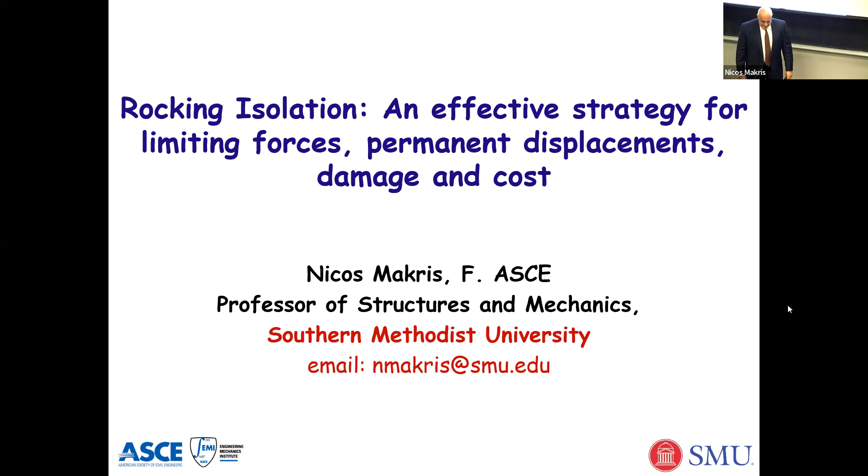So today's talk is on rocking isolation. And I will commence my talk with... this way, yes. So Tommy, the slides are advancing like this, right? So anyway, I'll commence my talk with this aerial view from the Carquinez Strait, which is slightly north of San Francisco, as we drive from San Francisco to Sacramento.

It shows in a rather convincing way the growing transportation needs of our society. Here you can see three bridges: a 1930 steel railway bridge that's still around as a historic structure, a 1962 bridge that for many decades served both the inbound and outbound traffic from San Francisco north, and a more recent bridge built to serve the outbound traffic from San Francisco to Sacramento, whereas this 1962 bridge that had far exceeded its lifespan was kept in service using response modification strategies, serving the inbound traffic to San Francisco.

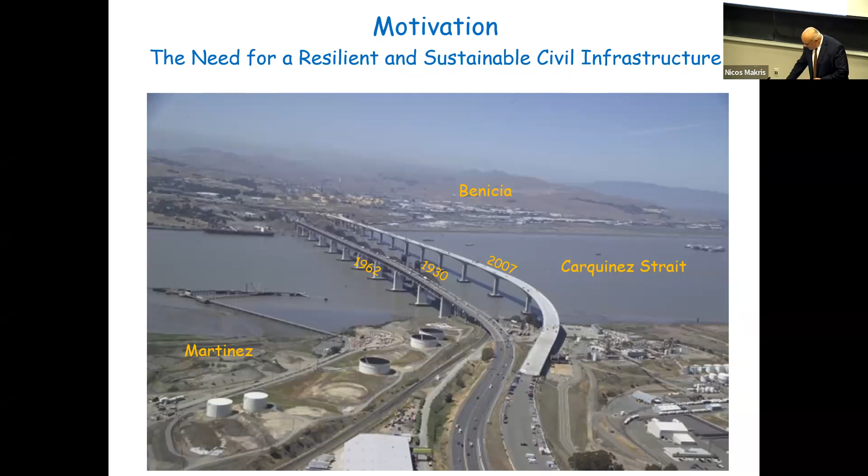How was this achieved? It was achieved with the technology of seismic isolation. This is a closer view of the 1962 Benicia-Martinez Bridge. Isolation bearings, sliding isolation bearings, were placed between the piers and the deck of the bridge to limit the forces and eventually the shear forces and overturning moments transmitted to the foundation of these rather brittle piers. In this way, by introducing this technology, they were able to extend the lifespan of the bridge.

Clearly, you see here that this technique of seismic isolation serves these current concepts of sustainability, right? So this bridge was kept in service. Now, sliding bearings is not the only technology to achieve seismic isolation.

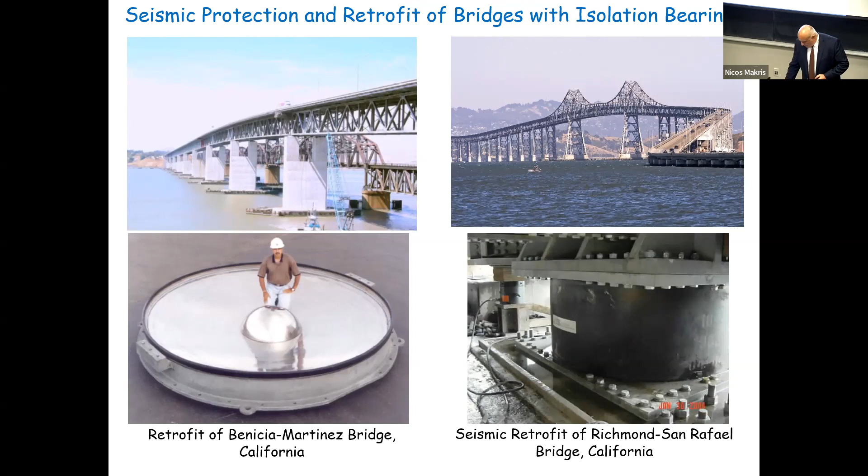Not very far away, some 40 miles south and to the west, there is another iconic bridge in the Bay Area. This is the Richmond San Rafael Bridge. Again, during the early 2000s, it was retrofitted with elastomeric bearings. So sliding bearings and elastomeric bearings are the two most prominent isolation bearings that we use for seismic isolation.

Now, in addition to isolation bearings, we can also modify the response of structures by adding damping. This is a fluid damper, one of the 94 fluid dampers that we tested for the retrofit of the Bay Bridge, and we'll talk a little bit about that.

What is most important to recognize is that these modern protection technologies consist of well-engineered devices that, when tested extensively and properly installed, lead to what we now call sustainable engineering. Sustainable engineering is the design and construction of structures that meet acceptable performance levels at present and in the years to come, without compromising the ability of future generations to use them, maintain them, and benefit from them.

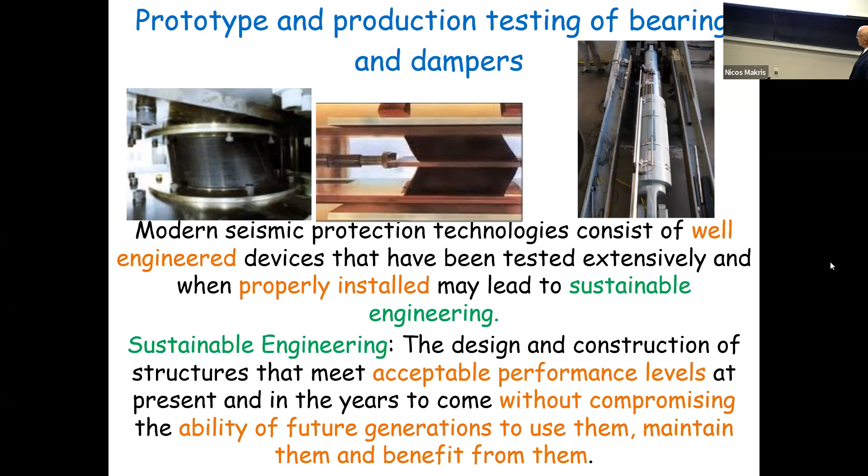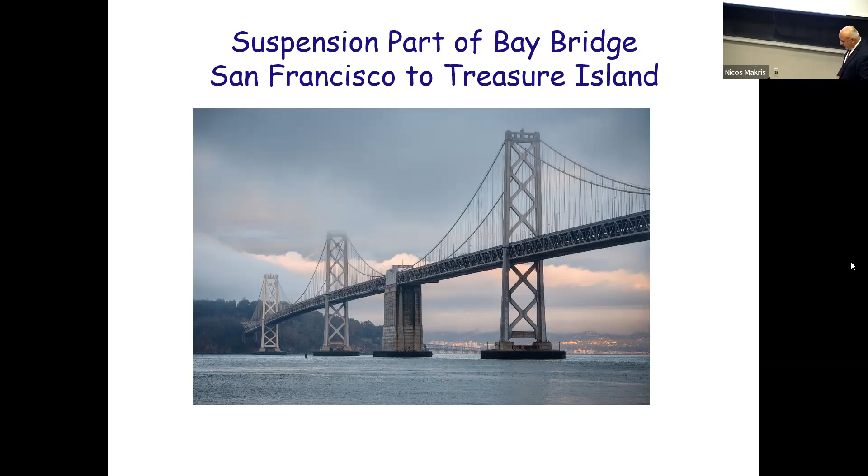So let's go to San Francisco. This is the Bay Bridge. You have here your back to San Francisco, looking to Yerba Buena Island. This is a suspension part of the Bay Bridge, and in the early 2000s this was retrofitted with 94 fluid dampers. This is one of them. These are big dampers, 450-kip capacity dampers.

A few years after they were installed, less than 5 years, right before the warranty of the damper expired, I was part of an inspection team to see the conditions, and to our surprise, all these dampers were experiencing appreciable leaking.

The reason for the leaking, which you can see here in an even more dramatic way, is that whereas these dampers were designed for seismic loads, those who did the design did not account in their installation that the bridge would also move from traffic loading. Every time an 18-wheeler was crossing the Bay Bridge, it was vibrating these by plus minus 2 inches that you see here. Because of this perpetual movement of the dampers, the end seals, essentially Teflon seals, failed.

In less than 5 years, before even the warranty expired, all of these dampers were essentially empty and they had to be removed. So here we have an example where in one of the most advanced communities of the United States, the Bay Area, and certainly one of the most advanced communities of the world, damper sustainability was not achieved.

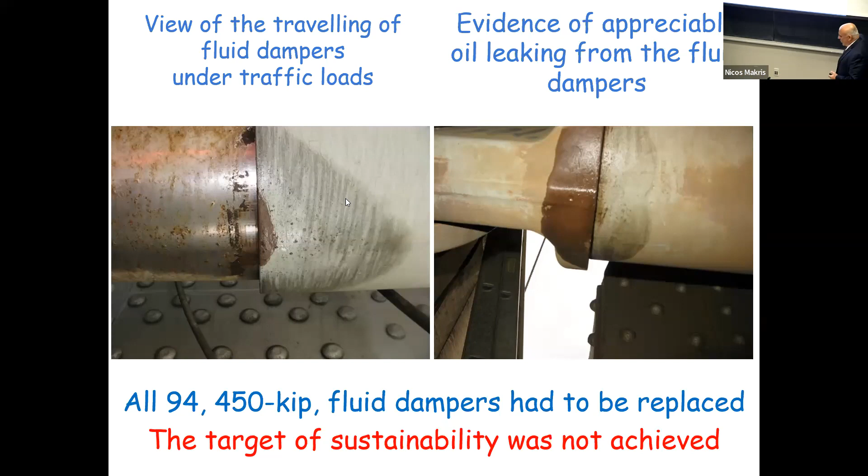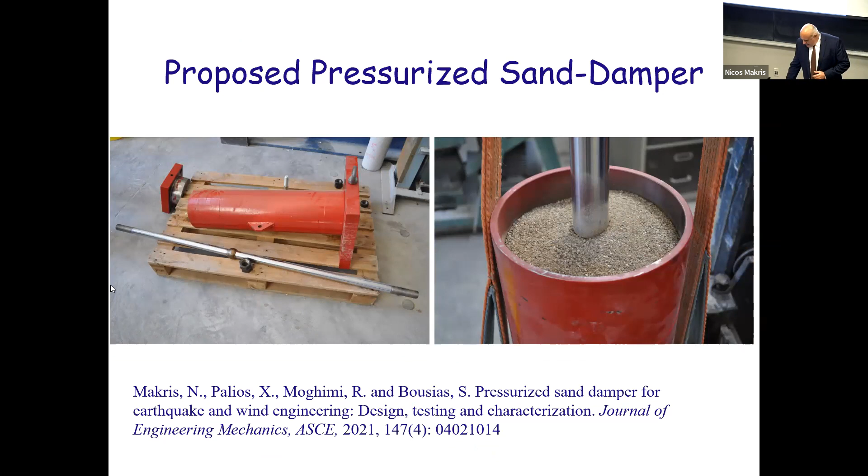So this was a motivation to do other things. We decided to design a damper that, instead of having oil inside, has sand. This has been working for several years. This is the first prototype damper that we built, actually in Greece, before I moved back to the States.

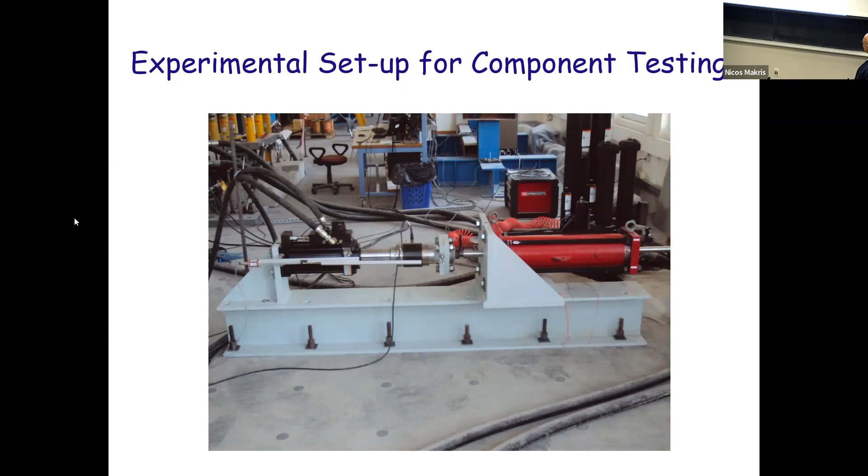So this is a view of the damper, and this is how it was tested. It's very similar to the setup you have in your small-scale testing facility. The idea is we mount the damper cantilevered, and as I explained to Professor Regis, this way you reduce the packing length, so the actuator is essentially pushing from here to here. Now, these are the force displacement loops that we report. You see that the damper has this hysteretic behavior as the sand is compressed, giving this pinching effect.

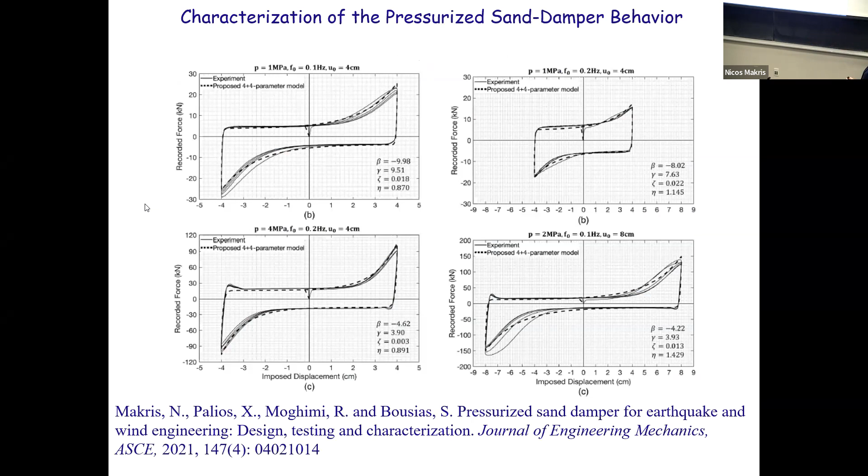I should say that something happened and we uploaded another version of this presentation. My student now at SMU, Costas Calvas, is working on a system design of this damper that we built here in the States under NSF funding, to study various parameters in the design of the damper that we need to understand in order to develop dimensional laws that will lead to optimal designs.

So this is the scene with response modification devices, but now I want to move beyond that to alternative ways of doing response modification strategies. Today I want to talk about rocking isolation: the basic concepts, application to valley bridges, and how these findings reinforced our ideas about retrofit of historic structures.

The motivation for developing rocking isolation can be introduced with this slide, where I show one of the many bridges that were built in the late 90s in Greece. This is a valley bridge, and when you have a valley bridge, you have very tall piers. This bridge is seismic isolated, actually with sliding bearings, where the coefficient of friction is only 5%.

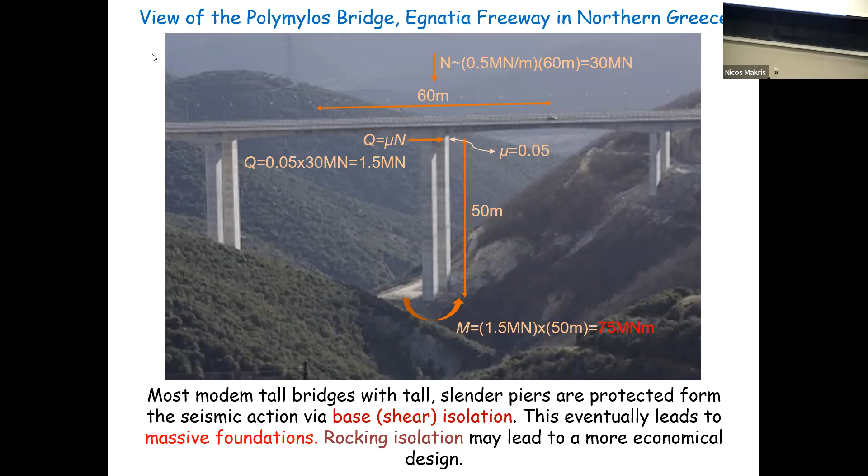And so the shear force, 5% of this force, is 1.5 meganewtons. But if you apply 1.5 meganewtons times the lever arm, you get this huge bending moment at the bottom that even very deep pile foundations cannot accommodate. You have to build caissons, so you go to this very expensive foundation design, and this leads again to very expensive structures.

So let's see if we can do something different.

In modern structural engineering, when we ask somebody to design a good frame, the first thing that comes to mind of a good structural engineer is to design a statically indeterminate frame, so that we have some redundancy. So static indeterminacy or redundancy is the first element in the design. The next one is that this frame should be ductile, the connection should be ductile, in order to dissipate energy during cyclic loading.

And the next element of a good structure is that even after yielding, this structure always has positive stiffness, so you avoid P-delta effects. So redundancy, ductility, and positive stiffness are the three good things we teach in the classroom for good structures.

Now ancient builders did exactly the opposite. Instead of building statically indeterminate structures, they built mechanisms. So a freestanding column is a one-hinge mechanism. Two freestanding columns with a rigid beam on top is a four-hinge mechanism.

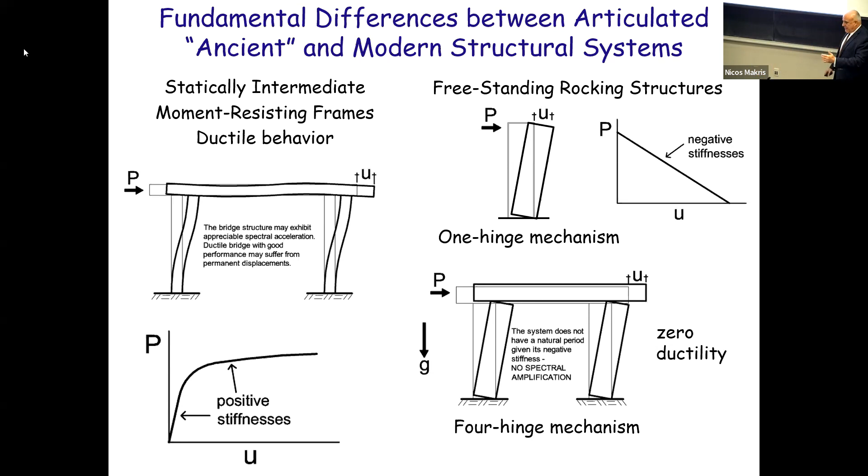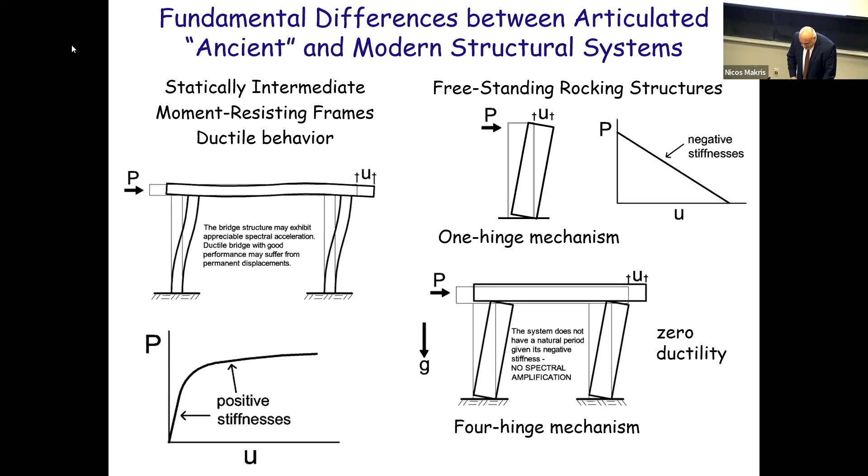So ancient builders did exactly the opposite: instead of redundancy, ductility, and positive stiffness, they had mechanisms, no ductility, and negative stiffness. Yet these structures did exceedingly well through the centuries.

They resisted the test of time, and these structures actually prove that they meet the current, most stringent design requirements — that they can survive an earthquake that has only a 2% probability of being exceeded in 50 years. If you do the calculation, this gives a return period of 2.5 millennia, and this is exactly the case here.

So these structures are indeed a triumph for sustainability. They have been around forever, without asking any maintenance, and the only thing mankind did to these structures was try to destroy them during various wars and other conflicts.

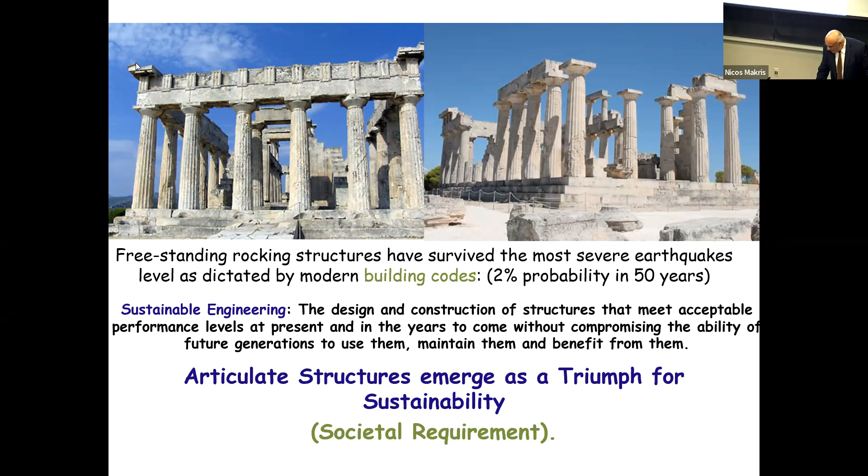So in order to understand why these structures behave so well and have such superior earthquake performance, let's study for a bit the rocking response of the single column, the solitary column, which is defined essentially by its width, height, and the intensity of the gravitational field.

In other words, the ratio of width over height gives a slenderness. And the size we express here with half diagonal, which is the square root of b squared plus h squared. So we have three things: either width, height, and g, or size, slenderness, and g.

In a similar way that a single degree of freedom oscillator is defined by stiffness, damping, and mass, a rocking structure, a rocking column, is defined by width, height, and G. These are the three things.

They look similar, but they are very different. For instance, we already stressed that the stiffness away from equilibrium in the harmonic oscillator is positive, whereas in the rocking column it is negative.

Another important element is that the restoring mechanism in a harmonic oscillator is the elasticity from the spring, whereas the restoring force in the rocking structure comes from gravity.

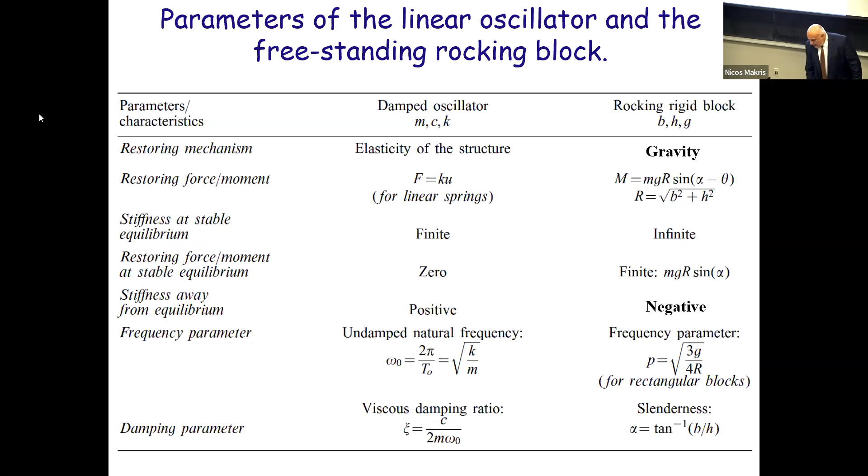Now, the stability of tall slender structures, of course, was well known from ancient times through the construction of these emblematic temples. But the first person who really uncovered its dynamics was George Housner back in the early 60s at Caltech.

He showed that among two freestanding rocking columns that have the same slenderness, meaning the same aspect ratio, the same width over height, the taller one is more stable. So he brought forward a size effect. What essentially he showed in his paper is that the larger of two geometrically similar blocks can survive the excitation that will topple the smaller block.

And he plotted these results in this way. Here, alpha is the slenderness. Actually a better way is tangent alpha, but when alpha is small, tangent alpha is equal to alpha. A is the acceleration of the pulse on the numerator, and G alpha or G tan alpha is the acceleration that you need to create uplift. So on this vertical axis, you have how much acceleration you need to overturn the column compared to how much acceleration you need to uplift the column.

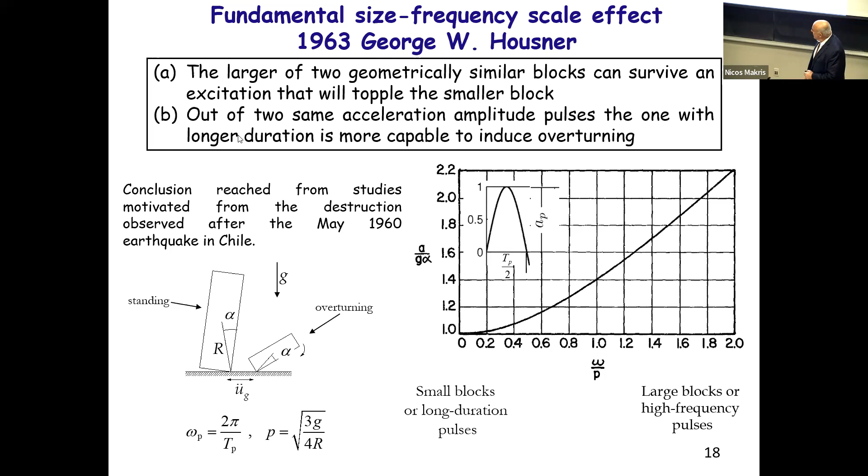So the column will uplift when the force equals G tan alpha. He showed here that as the size of the blocks or columns increases, this P here is the square root of G over R. So when R is bigger, going to bigger columns, this P becomes smaller. Omega is the frequency of the excitation. So when the size of the column increases, this ratio increases. He showed that there's a big margin between the acceleration needed to create overturning compared to the acceleration needed to create uplifting. This is why tall, big structures have this extra stability compared to smaller structures with the same aspect ratio.

So one can write the equations of motion. I don't want you to understand everything, but you have two equations, one for positive rotations, one for negative rotations, which can be combined using the signum function, a generalized function. All I want you to remember is that the angular acceleration equals this p squared, the frequency parameter, times something. As the size of the column increases, p decreases. So even without solving this equation, it tells us that in a bigger structure, p is smaller, and the angular acceleration is going to be smaller.

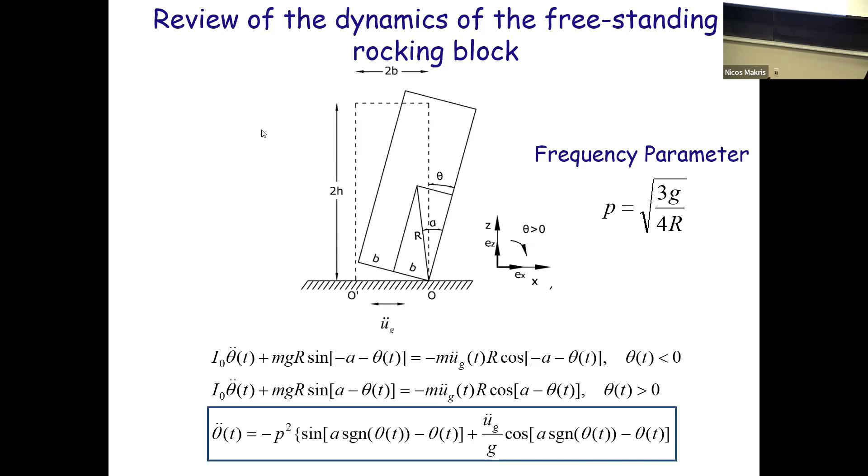Now I want you to remember this because I'm going to use it later on. George Housner, in order to create the overturning spectrum I showed you earlier, used a half sine pulse. Now half sine pulses do not exist in nature. What we have are ground motions, but some of them have these coherent pulses, and these are some of the mathematical pulses that capture very well the coherent component of strong ground motions.

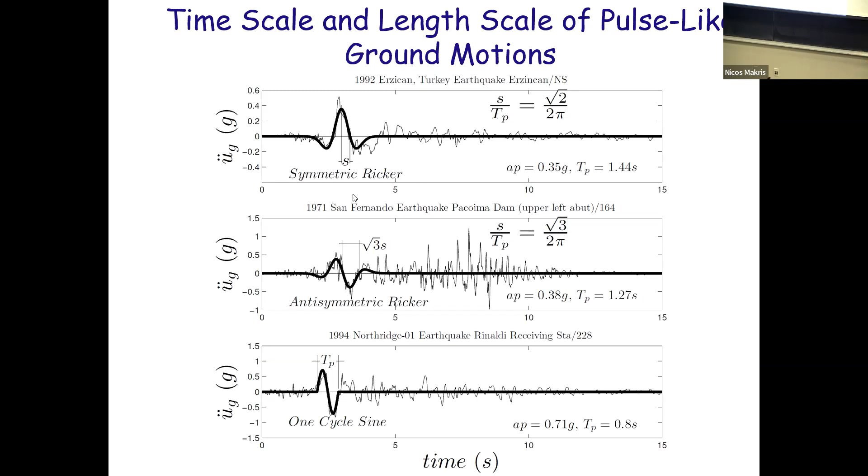So we derive, in a similar way that Housner derived the overturning spectrum for a half acceleration pulse, this same result now for these physically realized pulses. Again we plot the results in terms of the dimensionless term: the acceleration of the pulse needed to create overturning compared to the acceleration needed to create uplifting. You see that regardless if this is a one-sine pulse, a symmetric Ricker wavelet, or an antisymmetric Ricker wavelet, we have the same trend that as the size of the block increases, you need a way bigger acceleration to create overturning. And this increase is very dramatic.

Whereas here, of course, when the block is very small, upon uplift it overturns - there is no safety. But when omega p over p is on the order of 8, you get a 10-fold increase. So it will uplift, but then you need 10 times that acceleration to create overturning. So we can enjoy this huge dynamic stability in our design.

Okay, so I'm going to explain to you why this dynamic stability happens. Let's do what people were doing until very recently, when they were trying to find the stability of these freestanding structures. They were using what the code says to do an equivalent static lateral force analysis.

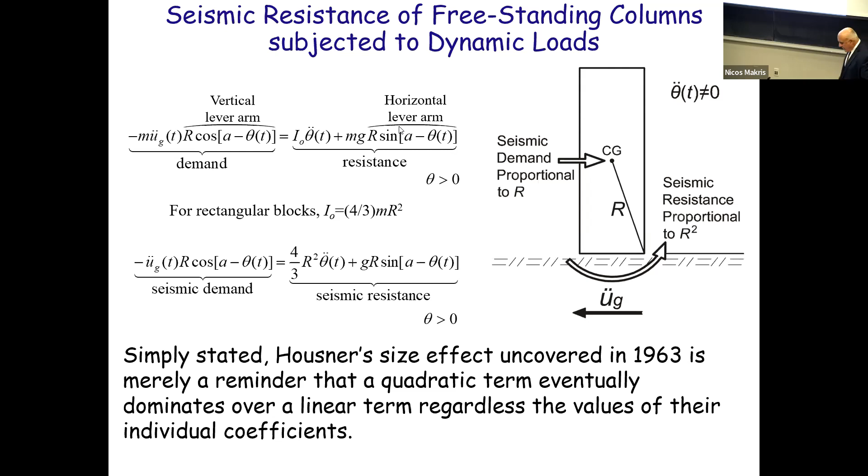This is the dynamic stability problem. So you have here the size of the column. This is the seismic demand, a linear function. This is the seismic capacity that comes mainly from the need to mobilize the rotational inertia. And eventually the seismic capacity will always be greater. So in the book, whenever you see something interesting, I also show the papers where we've published these results.

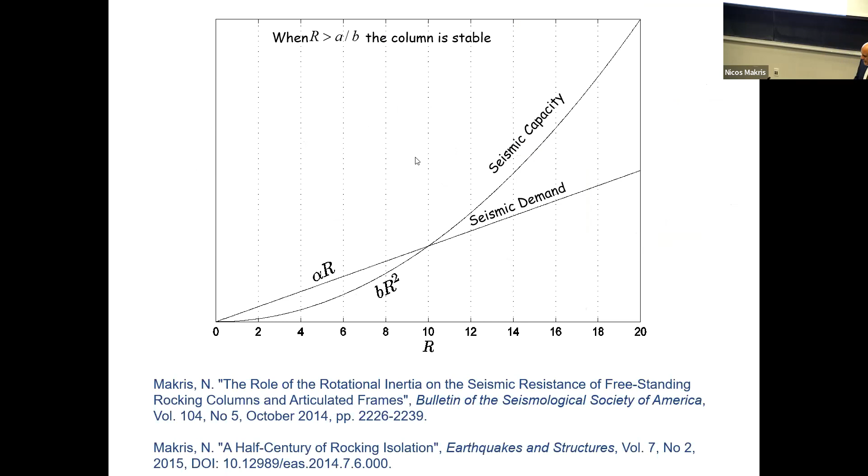Okay, now I want to move to something more practical. In life, when we have big tanks or when we build bridges, we don't have like a solitary column, but we have an array of columns coupled with a rigid beam. Would be columns coupled with a deck.

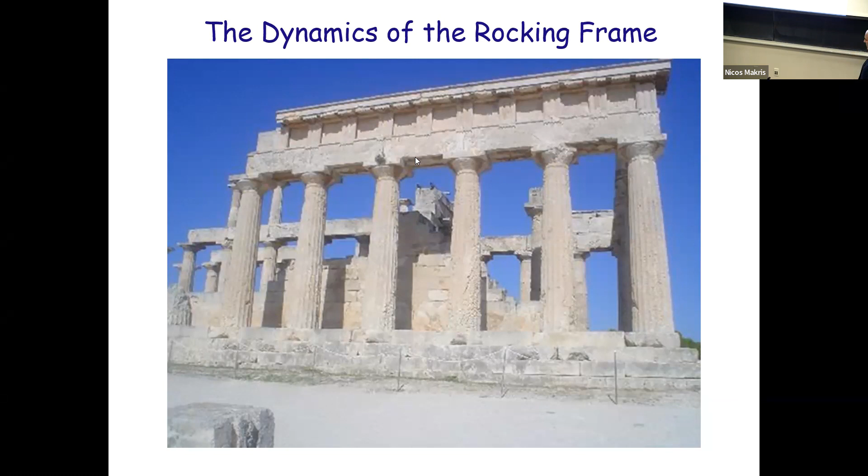So I want to find the dynamics of this system here, which is what is this? This is an array of freestanding columns of the same slenderness, same size, which are capped with a rigid beam.

Now, this is a single degree of freedom structure, but it's a difficult single degree of freedom structure, because we have too many unknowns. So the degree of freedom is theta. So each column rotates by the same amount. The horizontal displacement, the vertical displacement can be expressed in terms of the rotation theta.

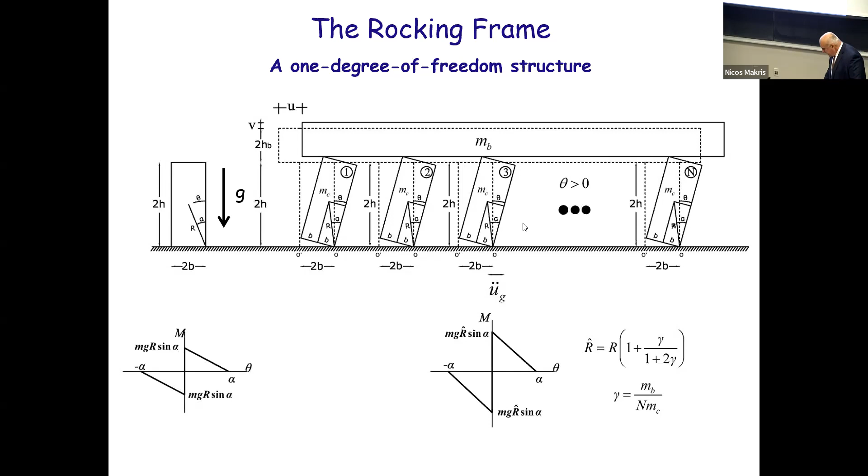You can solve this problem in two ways. Either you can use a direct approach, what we call Newton's law, F equals ma. But you can solve this only if you have only two columns, because you need to calculate these internal forces that are between the top of the columns and the bottom of the cap. If you have more than two columns, you have too many unknowns, you cannot solve.

But you have an alternative way of solving things in dynamics, to use Lagrangian dynamics. It's an indirect approach which essentially says that among all geometrically admissible paths that a structure would go from point A to point B, the true path that is going to happen is the path along which the difference between the kinetic energy and the potential energy is minimized.

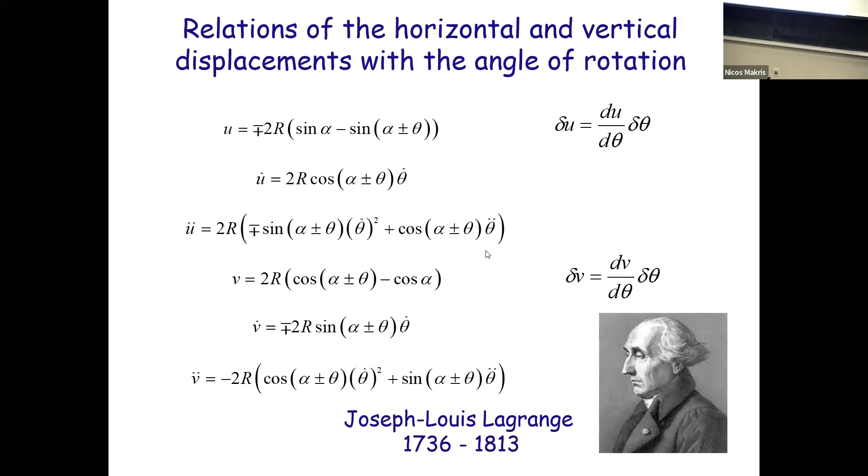Okay, and by doing this in dynamics, you get what's called the Euler-Lagrange equation, and then you can solve. So this is what I said before, that the horizontal and vertical displacement are related to the rotation theta. These are the velocities. So it's a single degree of freedom structure. And by following the Lagrangian formulation, because you have more than two columns, like when you have a bridge with more than two piers, this approach works.

This is the equation: T is the kinetic energy, theta is the rotation, theta dot is the angular velocity. The kinetic energy is very easy to calculate. Q is what we call the generalized forces. W is the work, and when you follow this Lagrangian approach...

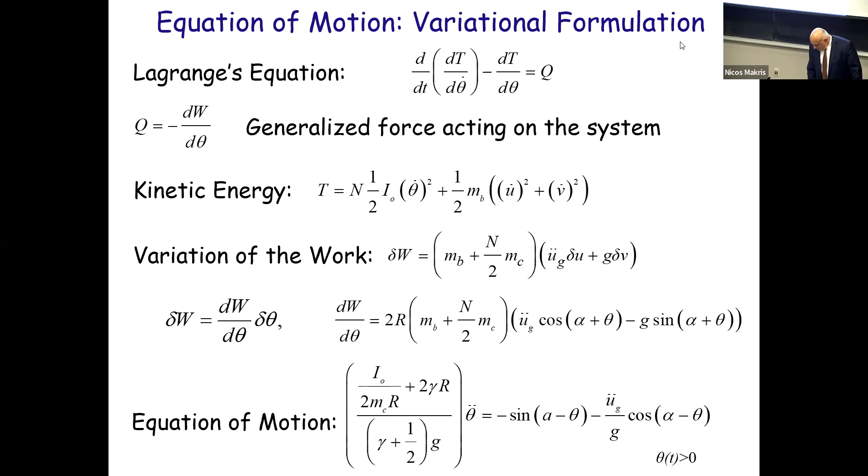You find the solution: the angular acceleration is something else that multiplies p squared, we saw this before, times exactly the same thing that appears in the solitary column. This is a very interesting result, because this ratio gamma is nothing else than the mass of the beam divided by the mass of all the columns, right? So this quantity gamma is always positive, it's a ratio of two masses.

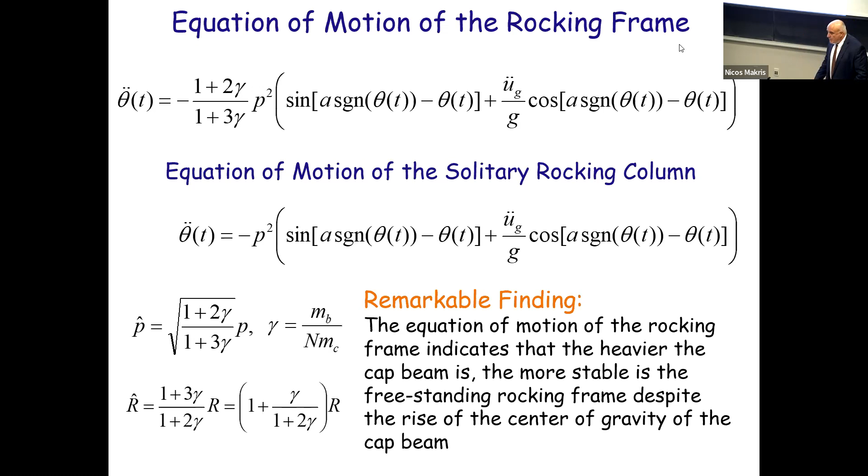The mass of the cap beam of that system divided by the mass of all the columns. So this ratio, 1 plus 2 gamma divided by 1 plus 3 gamma, is always smaller than 1. By being smaller than 1, it says that the angular acceleration of the rocking frame, what I call now, is equal to what happens to the solitary column, because P is the frequency parameter of the solitary column, times by this quantity smaller than 1. So it corresponds to an even smaller apparent frequency parameter. So this is even more stable.

So what we find here is that the equation of motion of the rocking frame indicates that the heavier the cap beam is, the more stable is the freestanding rocking frame, despite the raise of the center of gravity.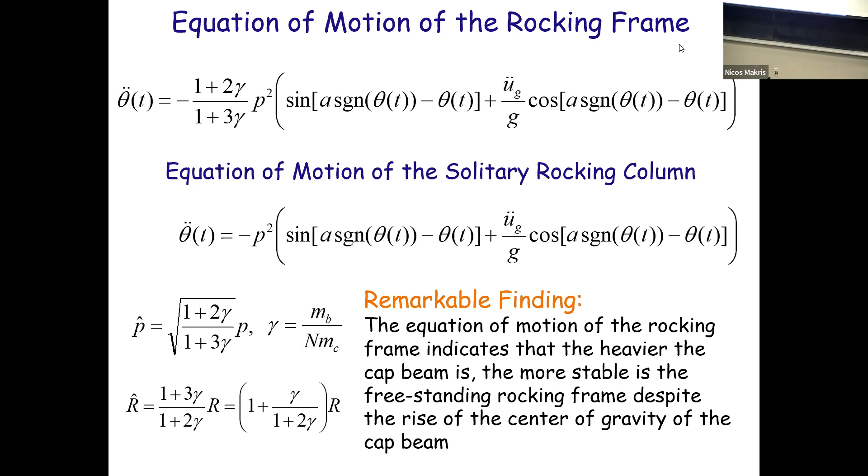Let me show you this schematically. This equation says that the dynamics of this system here, where you have an array of columns of slenderness alpha and size r, capped with a beam with mass b, is identical, mathematically identical, to the dynamics of a solitary column of the same slenderness alpha but with bigger size. But if you have bigger size, you are more stable. So this column here is more stable than this column, and so that system here is more stable than this individual column, right? So these are great news

for seismic protection.

So let's summarize what we have shown here. We knew already from George Housner that among two geometrically similar columns, the bigger one is more stable compared to the smaller one. And then what we have shown, and these are the papers that have shown these things, is when you take two of these columns and cap them with a rigid beam, this system is more stable than that, because this system here corresponds to a column of the same slenderness but larger size.

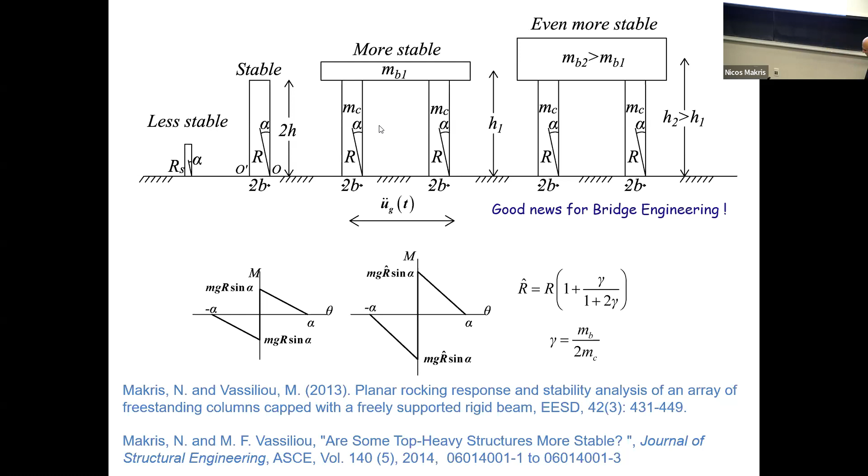But then if you increase the mass of the beam, that 1 plus 3 gamma divided by 1 plus 2 gamma increases asymptotically to 1.5. And as you increase the mass of the cap beam, this becomes even more stable, which is actually counterintuitive, right? But this is what the equations show, and this is what we have to accept. So this is great news for many things.

So we published this paper, 'Are Some Top-Heavy Structures More Stable?' And this is something that, for instance, was great news for reconstruction.

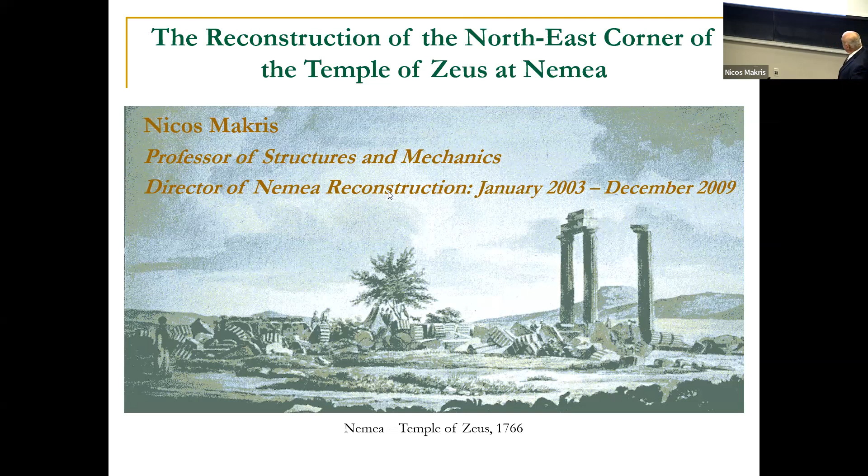As Professor Ricky said, I was involved in the reconstruction of an ancient Greek temple, this is the temple of Zeus in Nemea, Greece. There are only three standing columns from the ancient times. We embarked on this 7-year project to reconstruct this northeast corner. You see here how badly damaged the foundation was of the only one column remaining from the ancient times, on the base side of the temple.

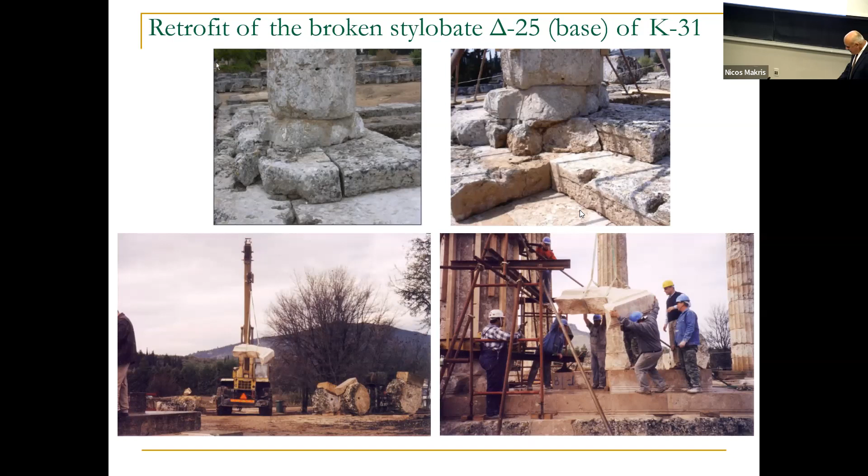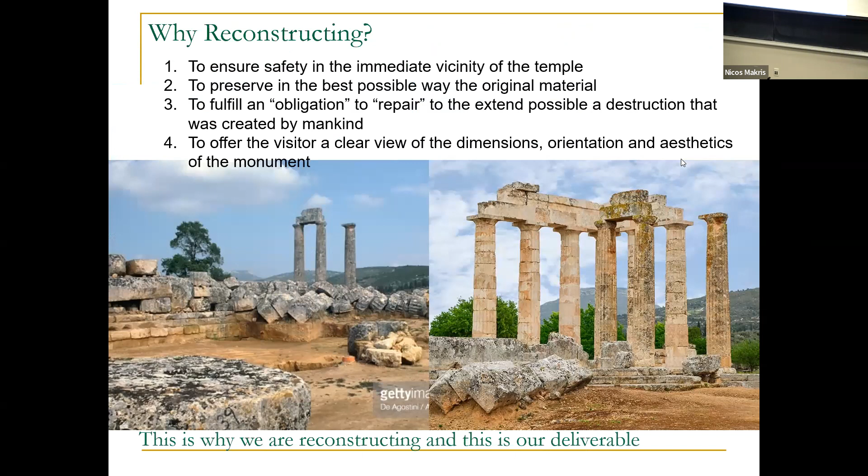There was a question of whether we had to place atop the epistyles. But now we knew that by putting the epistyles on top, which are top heavy, this is going to be even more stable. And how do we know this? We know this from this guy, from Lagrange, right? By Lagrangian mechanics, they had a very convincing argument to put this on top. So this is where we started, and this is how we reconstructed the northeast corner, and this is the end product of our effort.

Of course, this idea is also great news for bridge engineering, because now you know that if we let things rock, the heavier the deck, the more stable the structure.

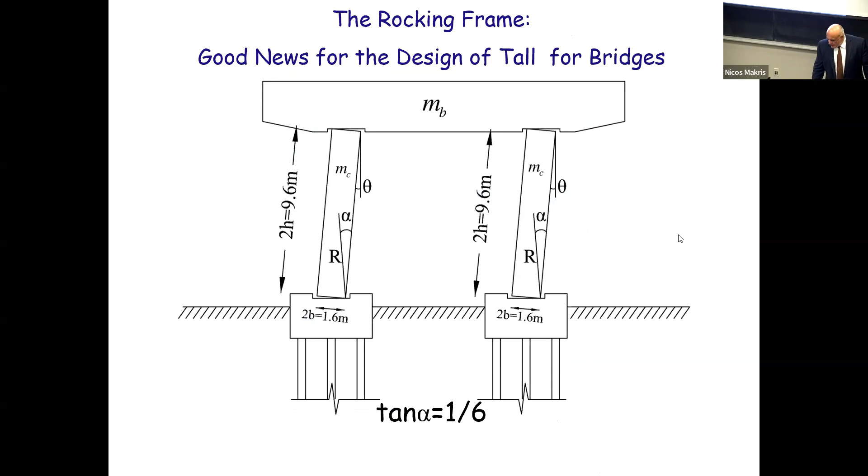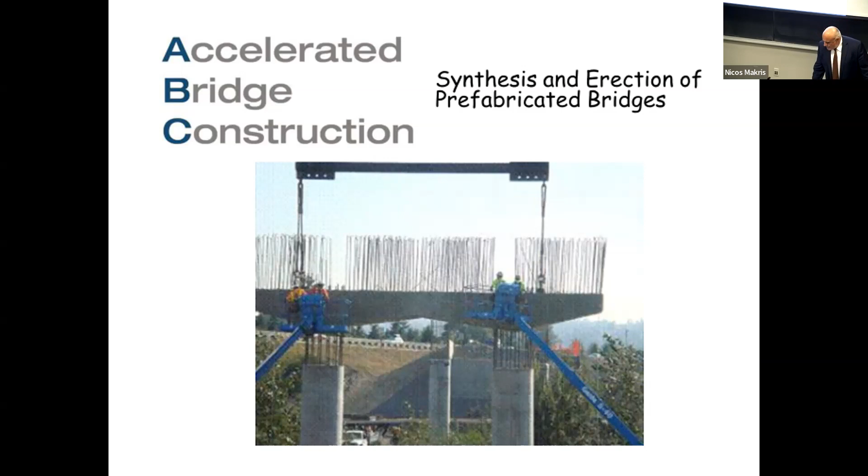We have been working a lot on this, and the idea is that at some point in structural engineering, when we build bridges with tall piers, we have to disentangle from capacity design, where we bring all this reinforcement, and move on to this concept of articulated structures, which lead to very stable structures because of their ability to move. And this was not a secret.

It was implemented in New Zealand with the South Rangitikei Bridge. The reason it was implemented is because these bridge piers are so tall that any other solution is not feasible. The overturning moments at the base of this bridge were so large that no pile foundation could be designed to take these huge forces. So the engineers decided to make these piers freestanding.

This was called at that time a stepping bridge, and this bridge is capable of stepping on its legs. It was truly innovative design. This was almost 73 meters tall, and it was indeed a seminal moment in earthquake engineering and in designing seismic resistant structures.

One thing I should say is that whereas these foundations were planned to uplift, these piers were equipped with a primitive damper. This was at that time a torsional yield damper. Imagine a tubular section where the two ends are fixed and you move the middle one up and down, so these tubular sections are subject to torsion.

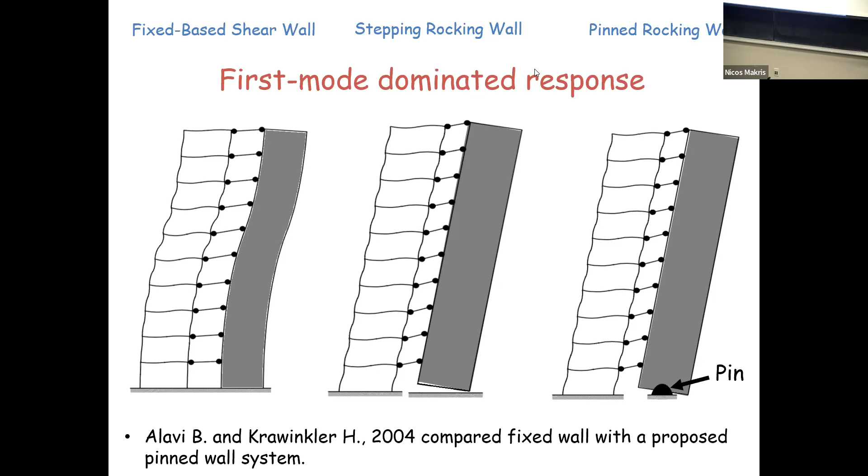So one way is to have this wall rocking, or in some applications in Japan, they have a situation where this rocking wall was pinned.

Let me go through some of the challenges of tall buildings with shear walls. When you have a fixed-base shear wall, you have larger ductility demands under near-fault pulses, cyclic degradation, residual drift, and large repair costs. When you have these inelastic deformations, you may keep the structure from collapsing, but your residual drifts—what's now called functional recovery—can be so large that essentially you have to demolish everything. So these are unsustainable parts of the practice.

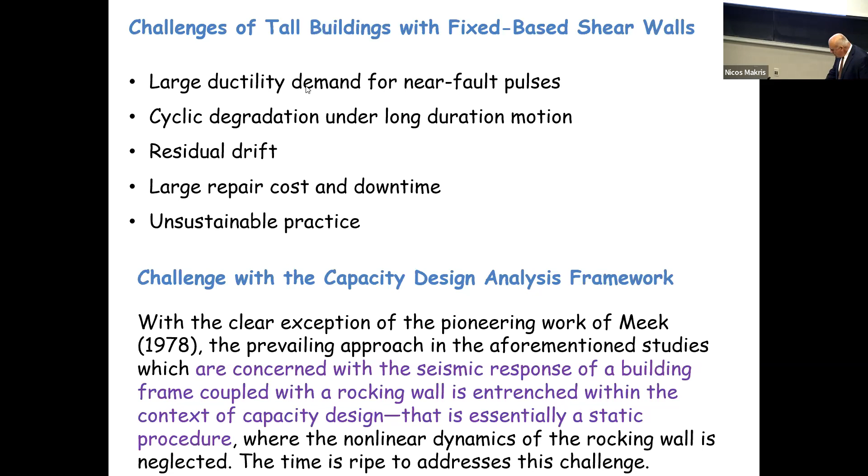So what can we do? We can do something that is not new. The idea of having rocking walls in buildings goes all the way back to the work of Meek in 1978, who published this paper and actually foresaw the need to have the moment-resisting frame somehow articulate to the wall with this kind of links.

So, advantages of stepping rocking walls: if the rocking wall is a stepping rocking wall, stepping on its two corners, you can accommodate large displacements while remaining serviceable immediately following a strong ground motion. It controls deformation with minimum permanent deformations, because the weight of the wall tends to recenter the whole structure even if it has behaved inelastically. It is indeed a practical alternative to capacity design.

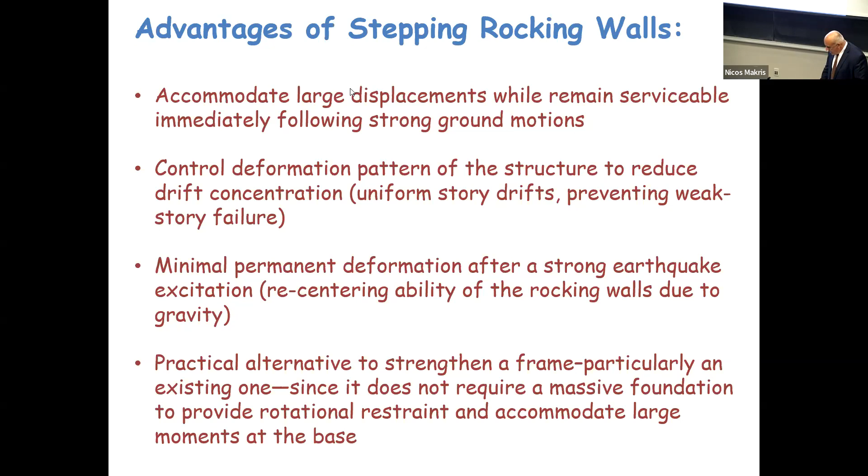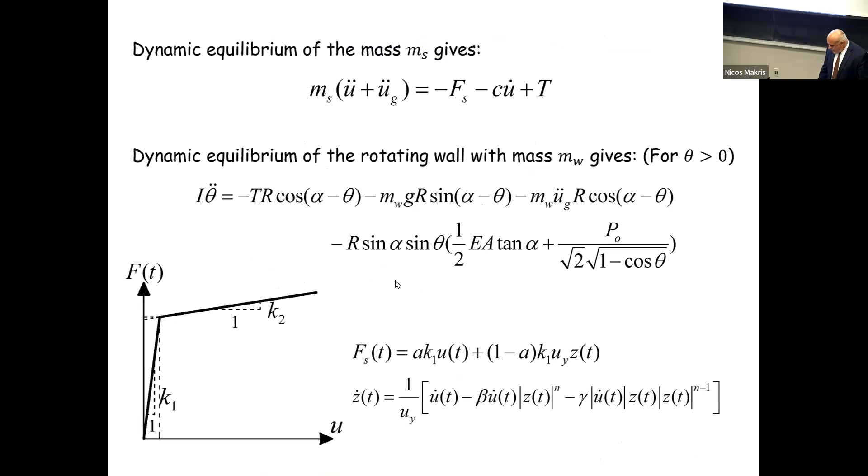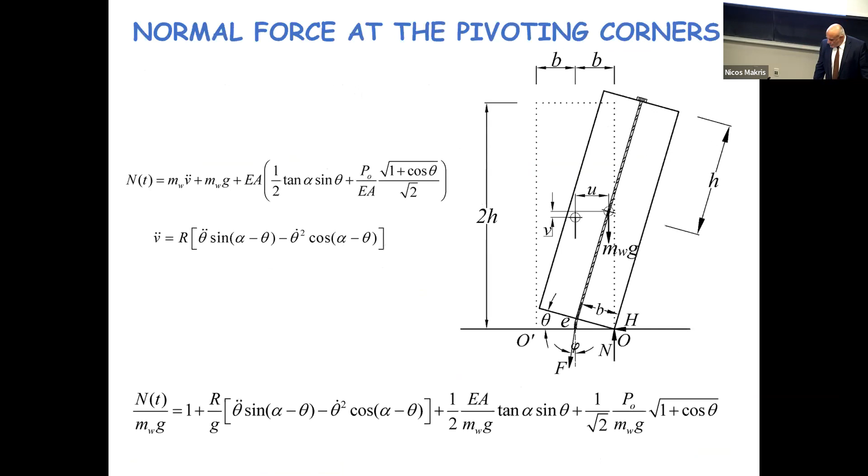We have done extensive analysis to see what the potential benefits would be by adding vertical tendons in rocking walls. The answer is that as you go to larger structures and larger rocking walls, the contribution of vertical tendons is marginal—the weight of the wall does most of the job. I have this in papers: the only thing vertical tendons do is increase a lot the reaction force at the pivot points.

We have seen here in your lab that some of these cross-laminated timber pieces suffer from this reaction force at the corners. So by creating a tendon, even when the wall is bigger, the only thing you do is increase even more the reaction force, without any change in the response of the drifts. So the conclusion is, when you go to tall structures and tall walls, there's no need for vertical tendons.

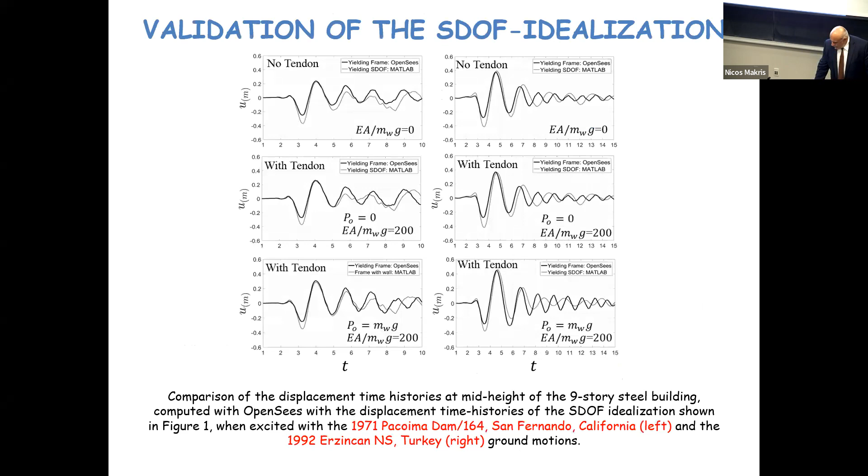I will move on because I'm running out of time. We did some analysis—these are results for the tendons.

I want to move now to my conclusions. So what are the conclusions? The main conclusion is that rocking isolation is a truly dynamic seismic protection strategy. You cannot design buildings where elements rock by using the equivalent static lateral force—it's a truly dynamic phenomenon, where most of the seismic resistance, when you have freestanding columns or walls, originates from the difficulty to mobilize the rotational inertia.

These are the results brought forward by George Housner at Caltech, that among two freestanding columns of the same slenderness but different size, the taller one is more stable. And then the findings of our studies.

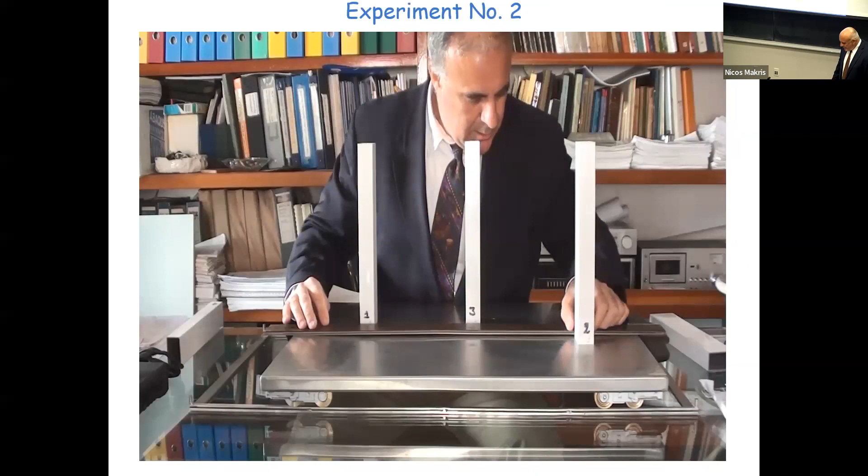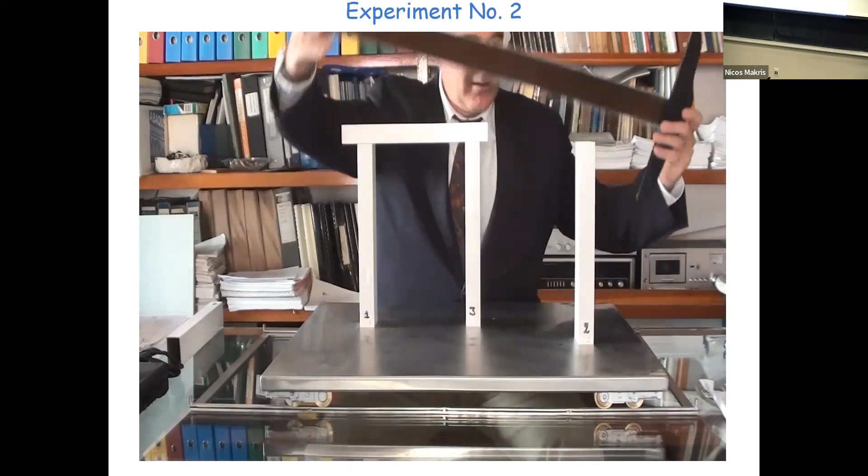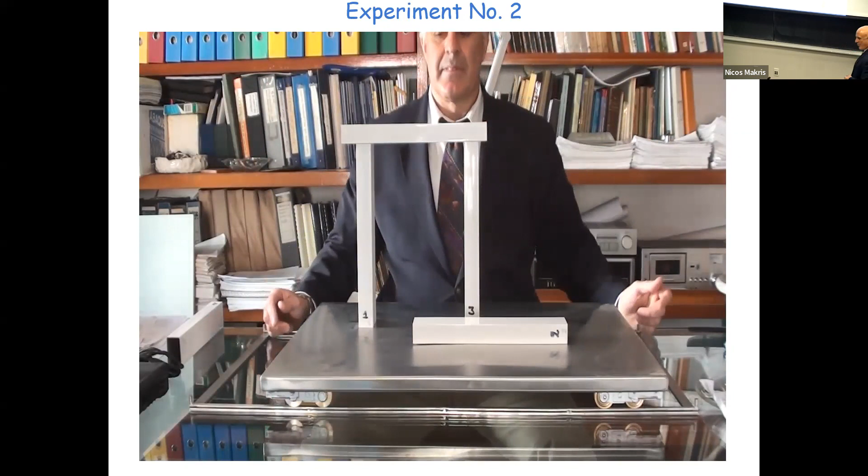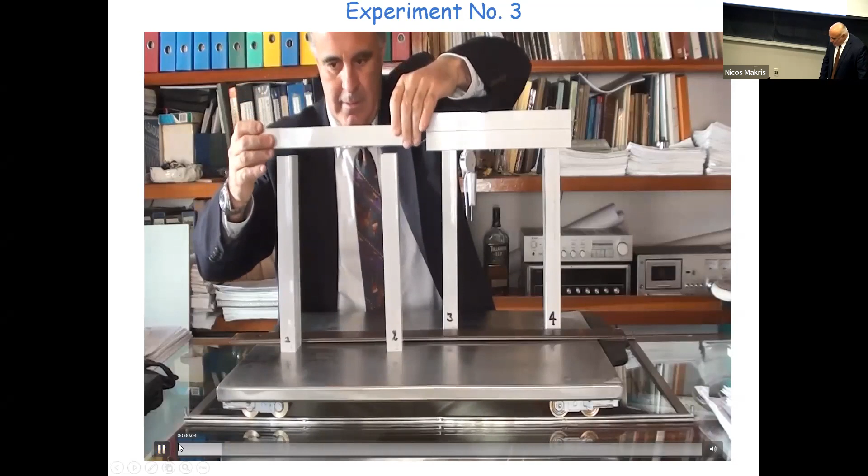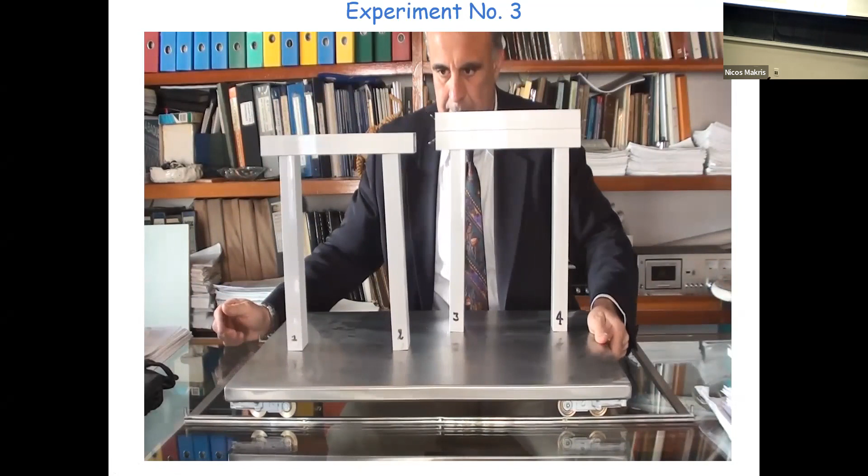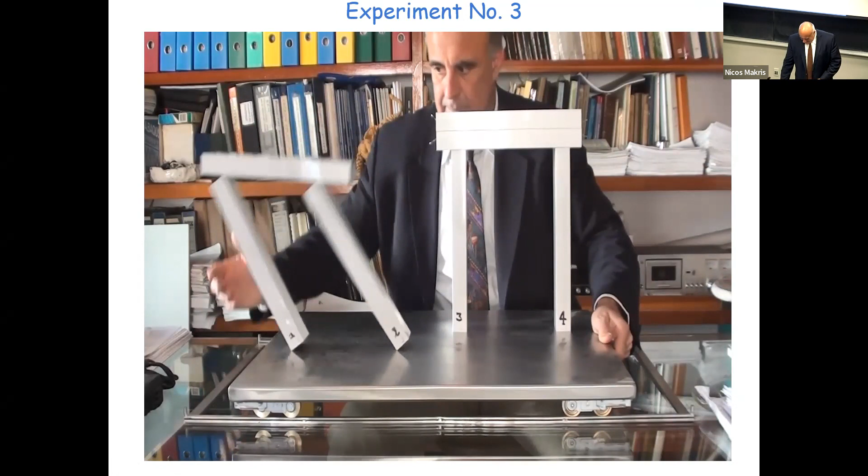The next conclusion is that if you have two rocking frames—you can see the trend—one has a cap here, cap beam, everything freestanding. This is my hand-driven shake technique I designed among two rocking structures, where the top end is overhanging. You stopped it too soon—you need to see the collapse. I'm only kidding. Okay, it's going to collapse. Let's move on.

We talked about the conclusions for rocking wall buildings too. Let me finish my presentation with this lithograph from the foothills of the Acropolis in Athens. There, extremely slender and tall columns have been standing alone for millennia, whereas Athens has experienced many earthquakes that destroyed high-rise buildings and factories—buildings well engineered with modern capacity design—while these columns have no connection, no reinforcement, no ductile design, nothing.

The only reason that these two solitary freestanding columns remain standing for more than 2.5 millennia is not because of any ductile connections or continuation of steel reinforcement, but because while they are very slender, they are tall enough to survive through the centuries the intense shaking that has damaged repeatedly the well-engineered structures in the city of Athens.

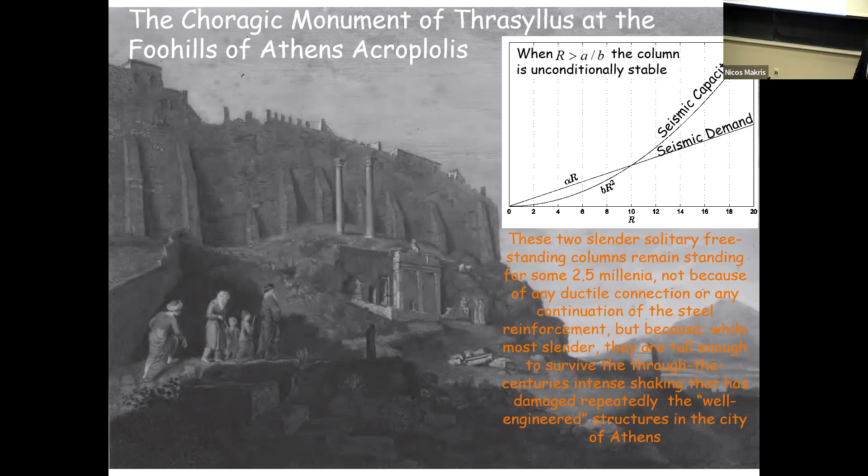So this is the last slide of my presentation that shows the adventure of the rocking frame through the centuries. It started with this very clean design, right? Then we have the evidence from nature that rocking structures can survive very violent earthquakes.

These ideas have been forgotten for decades now. Our thinking when we go to tall bridges remains entrenched in capacity design. However, there have been ideas to move away from that.

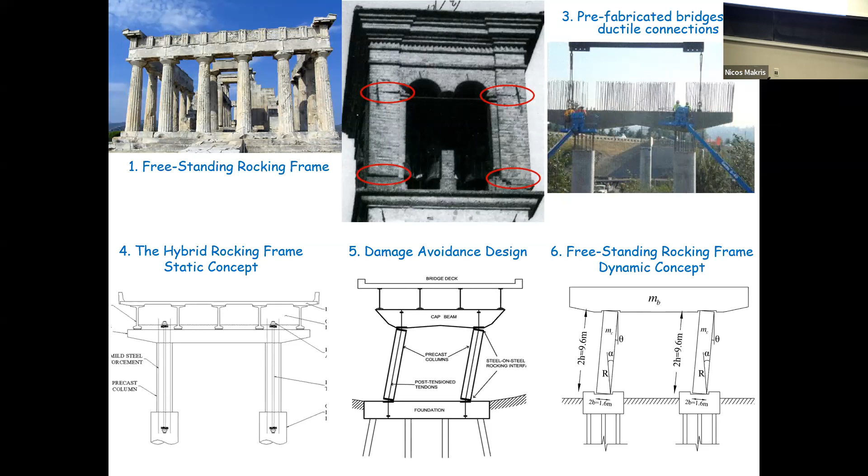I would like to mention this concept of damage avoidance design that is proposed by John Mander. But now we have shown that when these columns are large, you can even avoid this vertical post-tensioning and go to totally freestanding rocking structures.

So with that, I want to finish my presentation and thank you. This is a photograph of these two very slender columns that remain still standing. Thank you very much.

We have some questions. Okay, we'll start with, there's a few coming in. And I'm gonna just start and then we'll wait for the audience. You didn't come first, I'm only kidding, we'll get to you, sorry. So let's just read them here.

We'll go for the chat first because that's the first one that came in. What should be considered as the safe point for design on the moment rotation plot for this controlled rocking frame? So that was earlier in the presentation. What should we consider?

Okay, so let's remember what we say. So these columns have slenderness, they have slenderness alpha, and we showed that even when you have strong earthquakes, if your column is tall enough, the uplift and the overall rotation is a small fraction of alpha, of the slenderness.

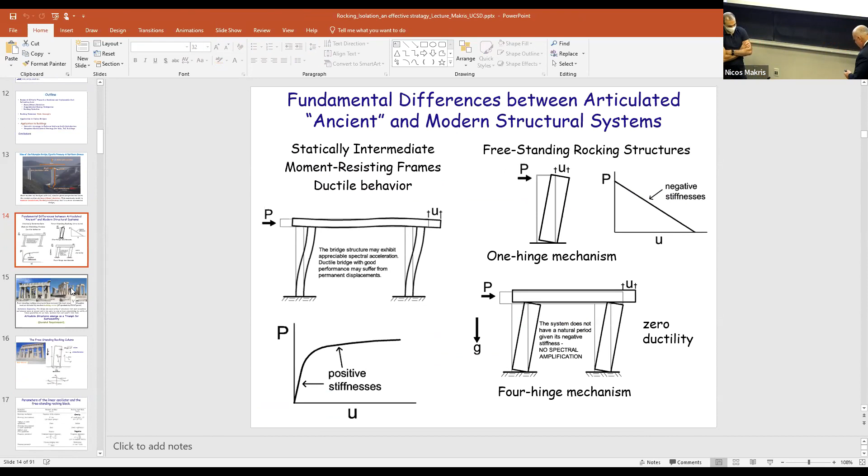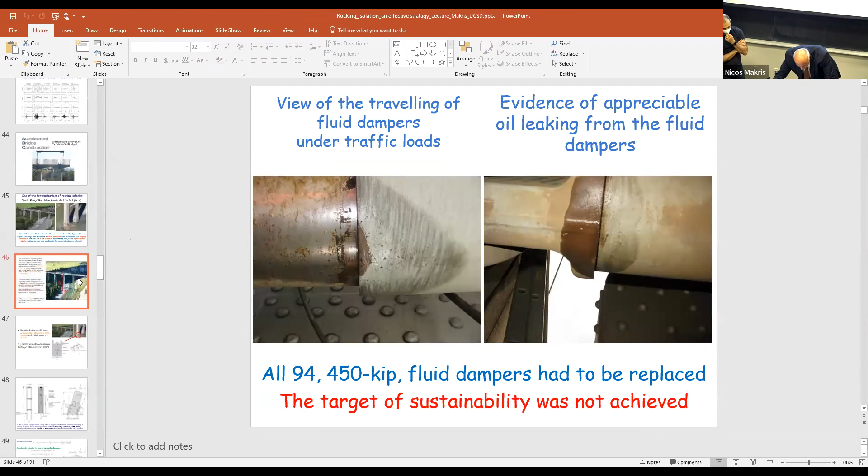So maybe I should go back here. No, I should go here so I can go very fast to answer this question. So I have here the South Rangitikei Bridge. So I'll start with this. Okay, so I'll go here. So these columns have...

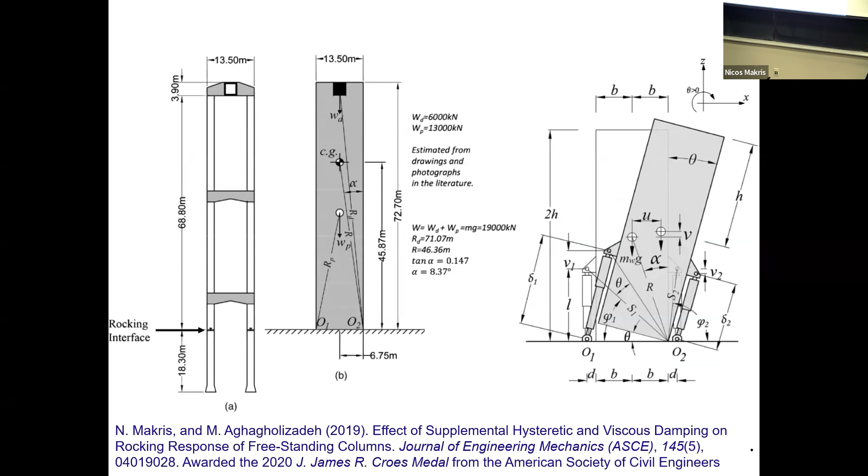They're very tall because of the railway track. The center of gravity is elevated, so the center of gravity is here. This is the slenderness. The slenderness is only tan alpha, which is 8.37 degrees, so tan alpha is 0.14. So whenever you have a horizontal acceleration, it's very important to understand this.

Whenever you have a horizontal acceleration greater than 0.14 G, which is a very weak earthquake, right, 0.14 G, these columns are going to uplift. They uplift, right? But because they are so large, the earthquake is able to uplift, but is not able to mobilize the rotational inertia. This is what is very important for us to understand, right?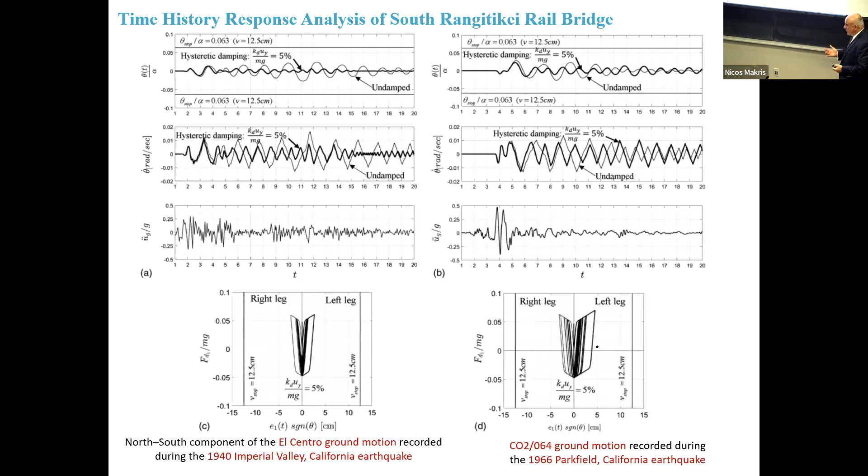Of course, when the column goes to its slenderness, then you are at the verge of overturning, but you are so far away. Even when you go to the Pacoima Dam record, here you barely reach this 6% of the slenderness. And when you go, let's say, to the Erzincan, Turkey record, you exceed that, but this is again less than 10% of the slenderness, 0.1. So the answer is that if you go to smaller structures, to smaller columns, then you have a bigger percentage of the slenderness, and this is something that needs to come out from the calculation.

What is the other question? Well, we'll ask our esteemed audience member here. So thank you very much for the presentation. You've combined two of my favorite things, which is ancient Greek buildings and structures.

I had a comment I was hoping you could talk about more. One of the things we've seen in modern buildings—I can't recall the name of the building in San Francisco—but they used performance-based seismic code to construct it. After they got it up, occupants had a lot of discomfort because of wind loading, a lot of acceleration. Typically you see that balance between wind loading requiring a heavy roof and seismic requiring a light roof. With what you're saying, you don't need to do one or the other—you can combine those two things and optimize under both. So could you talk a little about that? I want to comment on this because these are extremely interesting questions.

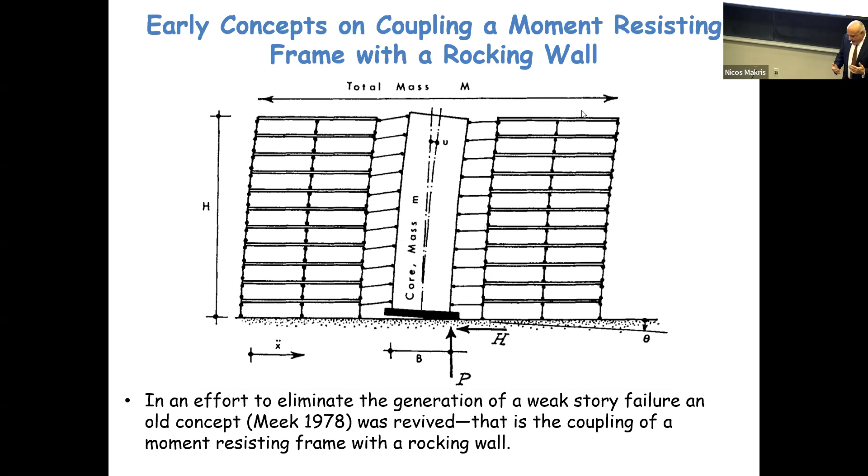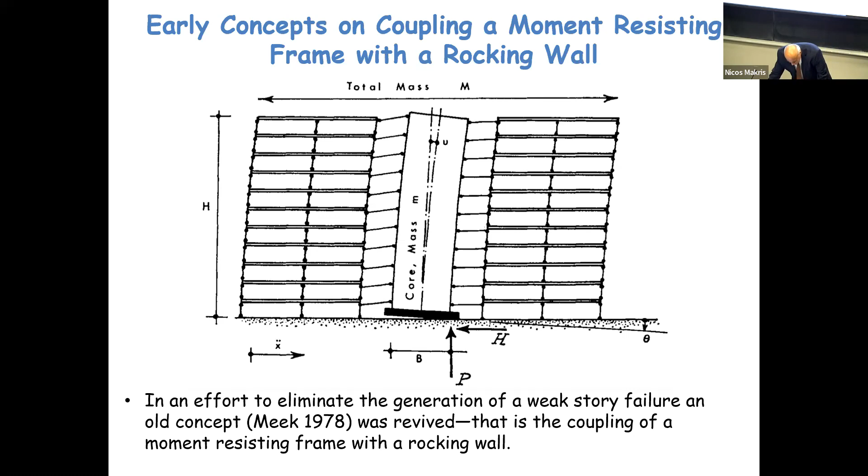But there are temples in Greece built out of limestone, and limestone has a compressive strength of only 5 megapascals, a quarter of concrete. They knew that when their columns uplift, the columns would get damaged, so they created intentional fuses. What are these intentional fuses? I don't know if you've seen these columns—maybe I have them at the beginning of my presentation, I don't know if I can pull that up.

So you can see these flutes here. Almost everybody thinks that these flutes are just architectural elements. Well, it is very pretty because in Greece you have this nice sun, and the sun gets deflected and creates a pale image of the temple. So it's really beautiful, but it has also other purposes.

Each column has 20 flutes. These flutes were carved in the marble, and then they were installing, what's the word, artificial stone to make them even look better, like grout, like we use grout. They're grouting them to make them even better. So even before they were getting damaged, they had this grouting technology to make them look even nicer.

So this protruding corner, imagine that when you have these flutes, you have these protruding corners at the base. So when the column was uplifting, these corners were immediately cracking. But these are like very concentrated points. By having these points cracking, you're creating a finite distance where the column could rock. They're intentionally yielding the location where the column is going to rock by creating a finite surface. And then after the earthquake, they're repairing it with grout.

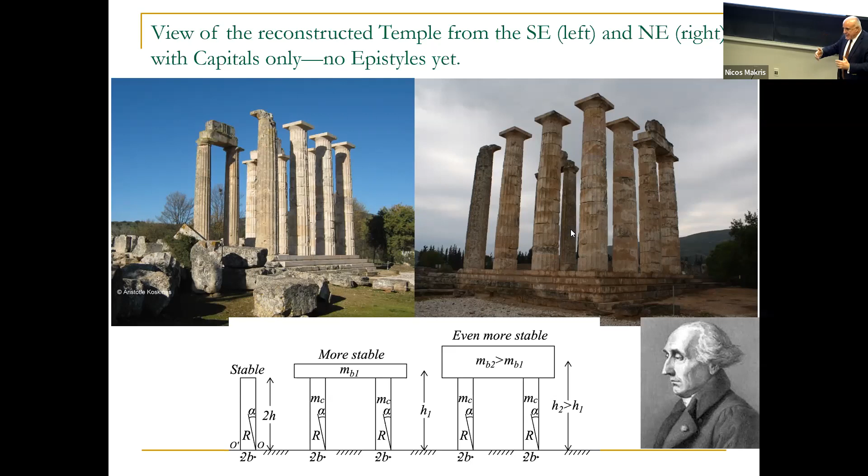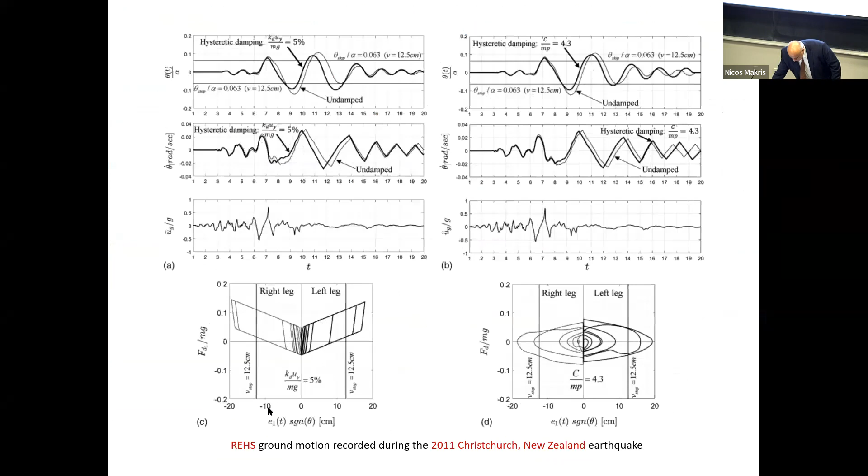Of course, if you have medium size columns, and I have some results here, let me see. I can explain it, don't worry. But if you go to very large columns, very large valley bridges, like the one I showed, the valley bridge in Greece, you have 60 meters. Once these columns start to rotate, the difficulty to mobilize the rotational inertia for recentering is so huge that it overrides any restoring force from a tendon. So when you go to big bridge piers, like 20-meter or 30-meter ones, the effect of the restrainers is marginal. You can totally avoid them.

So smaller bridge piers used to apply vertical post-tensioning. Bigger bridge piers you should let it go, because of the size effect.

Let's do the last chat from Khalid here: is size, frequency, scale effect shape dependent? For example, circular cross section versus rectangular. No, the size effect is independent of the cross section of the column.

It goes only with the vertical size of the column, so it's independent of the cross section.

All right, next question. Utilizing energy dissipation, are sacrificial elements advantageous for rocking frames or not? Those rocking frames will no longer exhibit negative stiffness while incorporating energy dissipators and post-tensioning. They will show positive post-uplift response as opposed to the freestanding columns.

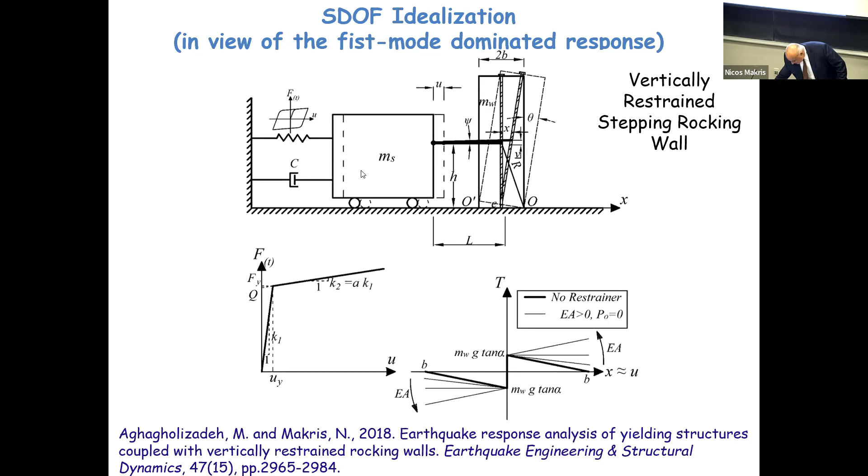Still, now you have this positive stiffness, but still in this case you enjoy your centering from the weight. The problem is that in this case here, I want to show this result here.

So this is a response of a building. The dark line is without tendon, with rocking wall. And there are two lines, one with a weak tendon and one with a very strong tendon.

Just highlight. Yeah, people can't see your highlighter. Yes. Top left.

So the effect of the tendon in this case, because it's a six-story building, is very marginal. The only bad thing that the tendons do, as I said, is they increase a lot the reaction at the pivoting corner. So in this case, it's clear that you should not put a tendon.

I don't know if this answered the question, but let me... one last question. Yeah, if any other ones want to come in, we might have... looks like this is our last one for now.

What type of damping should someone consider while analyzing rocking columns? For traditional design, we consider Rayleigh damping, but here it seems like the rocking column experiences some impact. Any idea what special things we need to consider while designing a rocking column in practice?

Yeah, I'd say that when you go to this kind of system, these are totally nonlinear systems. One should go away from Rayleigh damping. One should do a full nonlinear dynamic analysis.

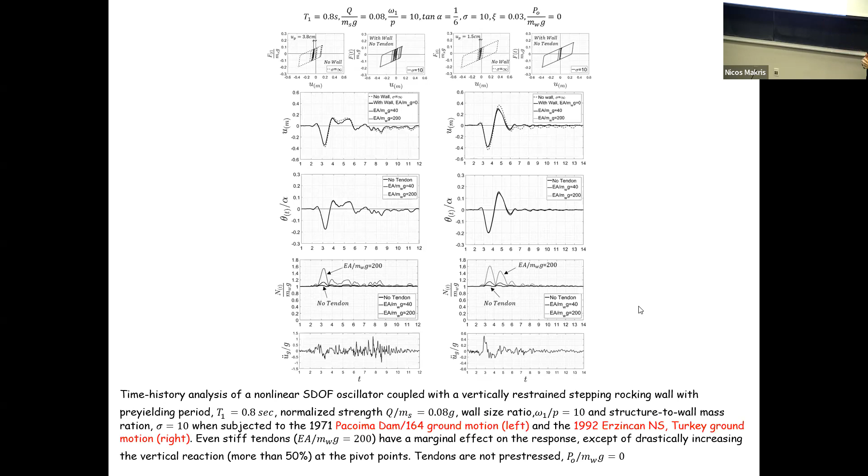All right, so I'll tell you the good things about coupling a structure with a rocking wall. Why? The first and most important is we don't want to have a weak story failure. And in the Kobe earthquake, we had a lot of things like this.

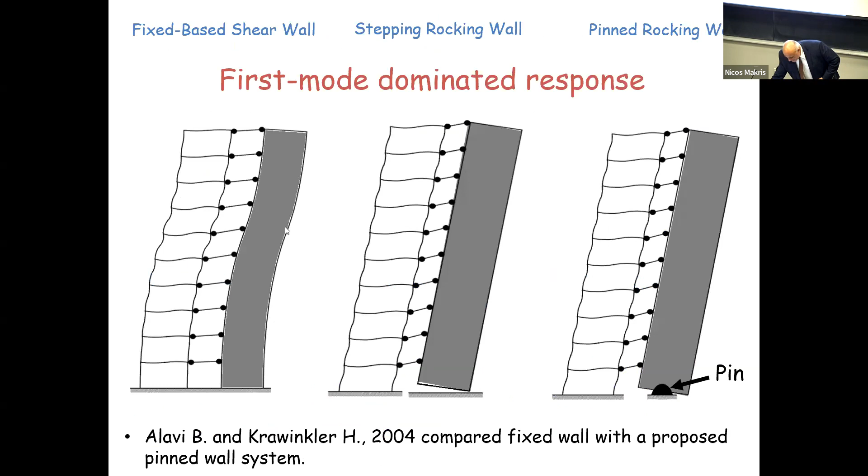You don't want to have this, right? So you say, okay, the first thing I want to have is a uniform drift distribution. I want to avoid this, right?

So this is already a very good thing. Now, this structure here has about 10 stories. If you put a wall with slenderness 1/6 or 1/7, you'll have a width of 7 meters, let's say. So when this huge thing uplifts, it has weight, right? So even if this structure deforms in its moment-resisting connection inelastically and you have permanent displacement, this heavy wall is going to recenter the structure.

So far, there is nothing about damping. The first thing is uniform drift distribution. The second thing is, what is the most important trend now? Functional recovery. So rocking walls are the best avenue to that, to recenter the structure and reduce or perhaps eliminate permanent displacement.

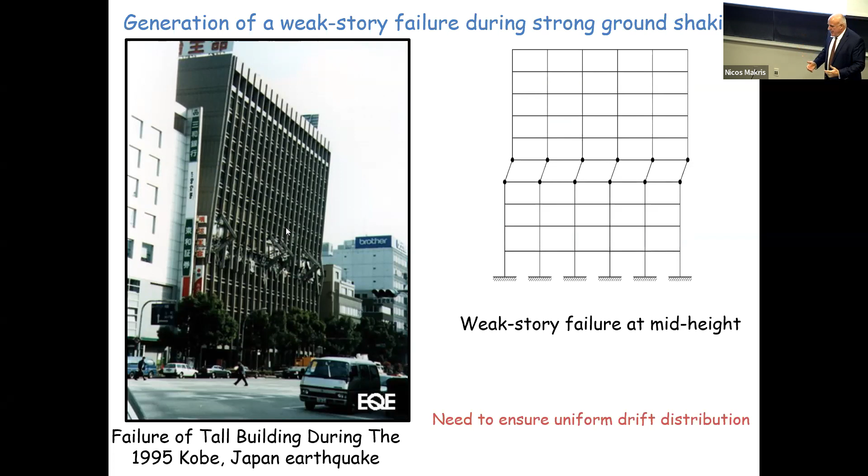Okay. Now you have to go one step further and say, okay, how about if I also put some damping? There are many ways you can put damping, but perhaps the most interesting way is this. Let's say this is your rocking wall. You can either put vertical dampers here, like the fluid dampers you are testing, or perhaps you can put buckling restrained braces, inelastic yielding dampers.

Now, again, the same story. If your structure is not very big and your wall is not very big, the effect of these things is going to be noticeable and you are going to benefit. But if you go to a very big structure where this wall is very big and heavy, the effect of these things is going to be unnoticeable, right? You have to do the calculations, but these are the things we have observed.

So far, we have done only planar motion of these frames. I think the next step is to go to a truly three-dimensional analysis, like you do here in your test, bidirectional testing, and reassess all these findings. But at the end, I think this scale effect—when you go to bigger structures, the effect of setting something in rotation mobilizes the rotational inertia, which goes to the square of the size—overrides every other effect.

Any follow-up? Okay.

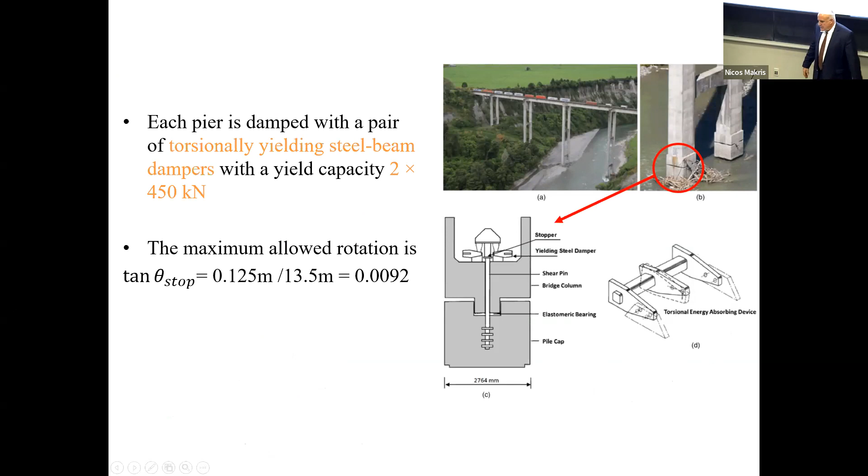So one way of avoiding this is to lock the damper with some fuses, so they don't vibrate during traffic loading, and during the big earthquake, these fuses are going to give. This is one way to do this, but it was not done at that time.

If I can say one last thing, I want you to leave this room remembering that seismic protection, especially in freestanding rocking structures like columns and frames, comes from dynamics. It's a phenomenon where motion creates stability. The ability that these structures are able to move, able to rotate—by being able to rotate they mobilize the rotational inertia and become stable. It's the same way that when you're on a bicycle and you're moving, you are stable.

Because of what? Because you enjoy the angular momentum from the wheels of the bicycle. And when you stop, you can no longer maintain equilibrium—you have to put your foot on the ground. The same way that on a bicycle motion creates stability, is why ancient Greek temples survived for 2.5 millennia. Motion creates stability.